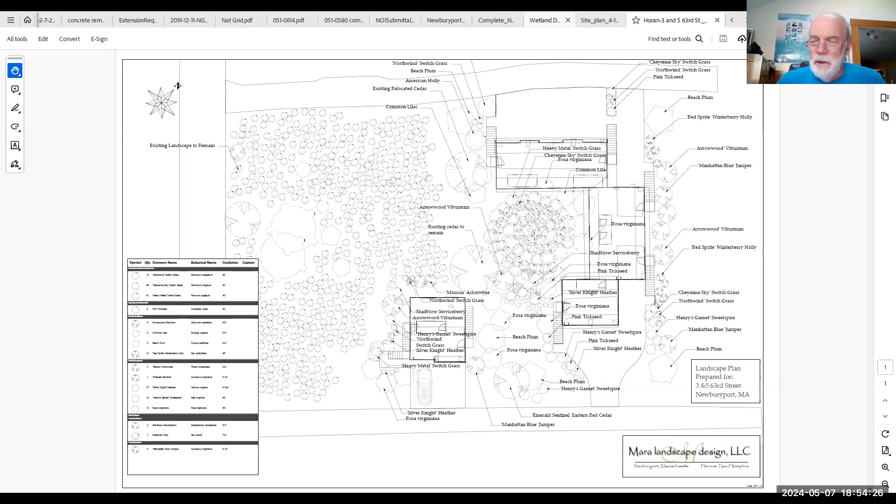Tom, have we done a certificate on the single family house right on Northern Boulevard? No, I don't believe we have. That one is no longer under the control of Chris - he sold it to a private person who built the project, and my understanding is they had the same issue with the bunnies. There's something going on right now, I think personal issues with that owner, so I'm not quite sure where they're at in following up, but they had the same thing. They put dozens and dozens of American beachgrass plants out, probably hundreds, and the bunnies just ripped them all out. So we'll need to address that at some point.

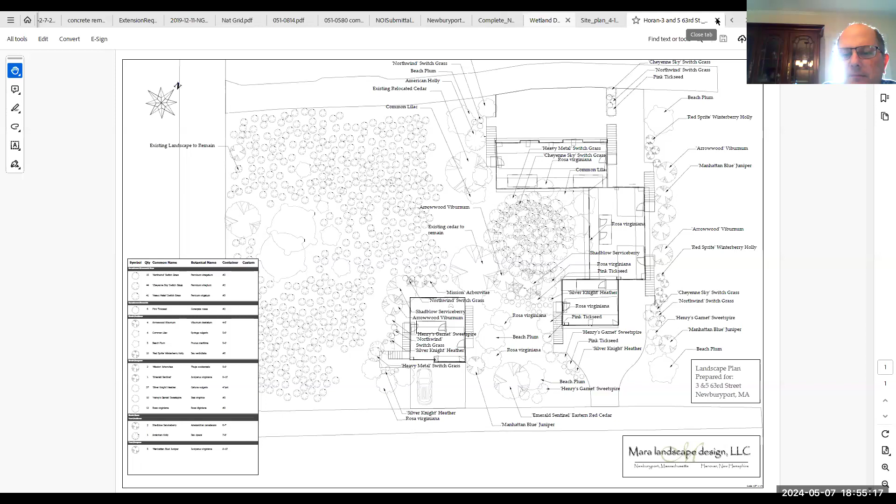Right now I'm just trying to get 3 and 5 closed. 5 looks good - I mean, sorry, 3 looks good. 3 is that single family home on 63rd.

All right, okay, that's right, set. All right, on to - thank you. Regular things.

Andrew Cole, 95 Water Street, request for extension. I switched the agenda a little bit because we had some scheduling problems. All right, never mind - Lisa Nardone, 5 Harbor Street, request for determination.

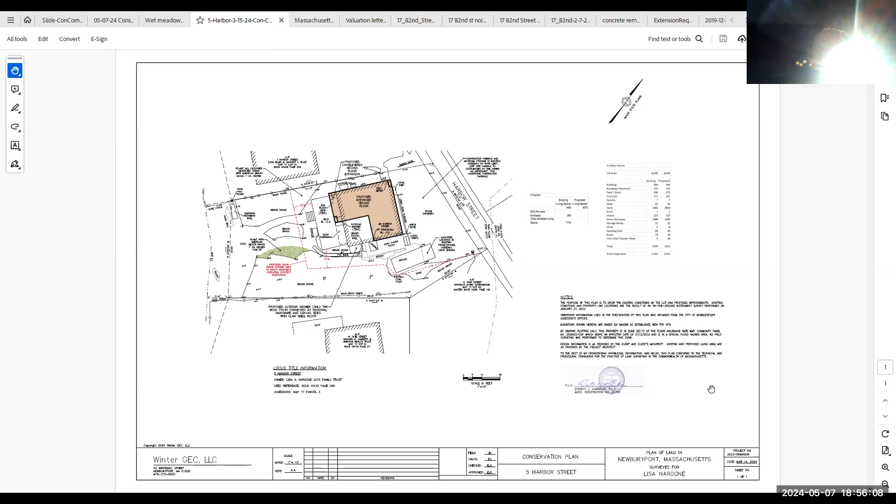Tom Hughes with Hughes Environmental Consulting. You may recall we were pretty much good with this, only we gave you a lot of information and it was too close to your meeting date for you guys to read through with regard to the 50% thing. So assuming you've all read through that, I can go back over things, but this is pretty simple, pretty much within the footprint of the building. Really the 50% rule was the big deal here.

Should I just open it up to questions at this point? This is the letter that was submitted right before the last meeting from the appraiser. Down at the bottom, he gives the summary, which shows a 27% increase in market value post-construction.

We also gave you an updated structural letter that removed elements of the project that had been taken out. And I think that was it.

So Julia, does this answer our questions? It does, because we just need to make sure that the increase in value of the structure after construction of the proposed renovations would not be more than 50%. It's at 27% - previously they just hadn't given us that comparison. They only gave us the as-is appraisal report. Now he's submitted the post-construction appraisal report and given us the summary document showing the difference in value, so this does answer it.

It's below the threshold for substantial improvement, so they can do the project without having to elevate the entire thing on pilings. Okay, so we would need a -3 for this?

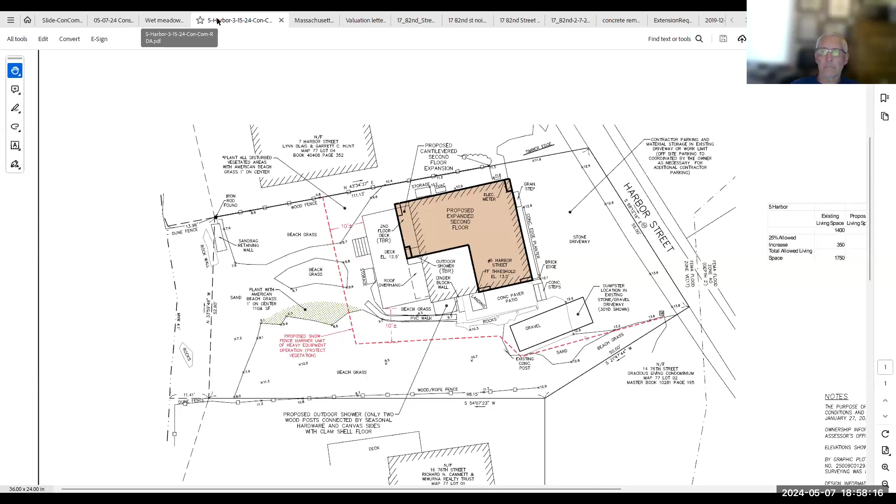Yeah. Okay, I'll make a motion to issue a -3 determination. I'll second. Roll call: Steve Moore, yes. David Vine, yes. Dan Warshaw, yes. Bill Mullen, yes. And I vote yes. All right, thank you very much - I know they're anxious to move forward.

Good evening, Tom Hughes with Hughes Environmental Consulting. You may remember this one - this is the one, Tom Lawrence. You guys had an enforcement order. We came in with an after-the-fact notice of intent.

We came up with a way to elevate the existing deck to get 2 feet clearance. You guys issued a variance on this one. We've given you an as-built that shows we met the clearances, the 2-foot clearance around the raised deck that we agreed to do.

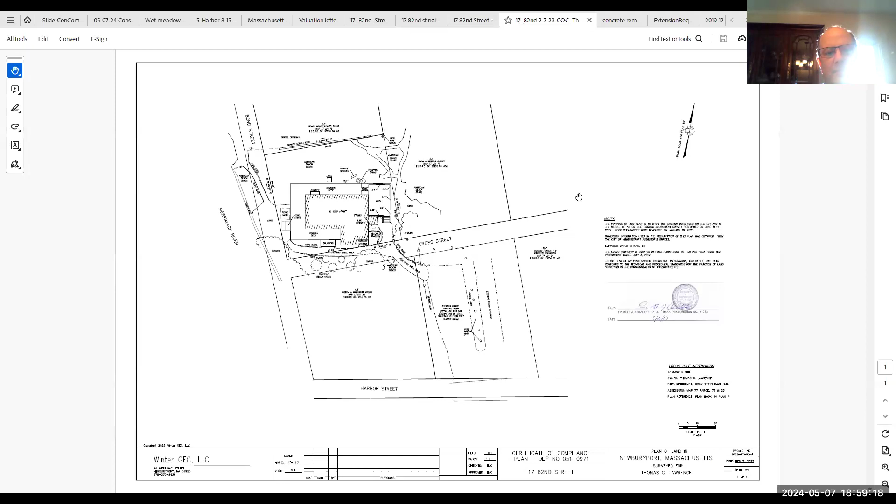Mr. Lawrence put in the plantings, put in little rope fences to try to contain the walkways, put in the crushed shell walkways, so we have defined paths and it looks really good. All this work was done last year, right before I got COVID for a month, and then it just kind of fell by the wayside to get submitted to you, as did a lot of things back then. So I'm just trying to catch up, and this is one of those things.

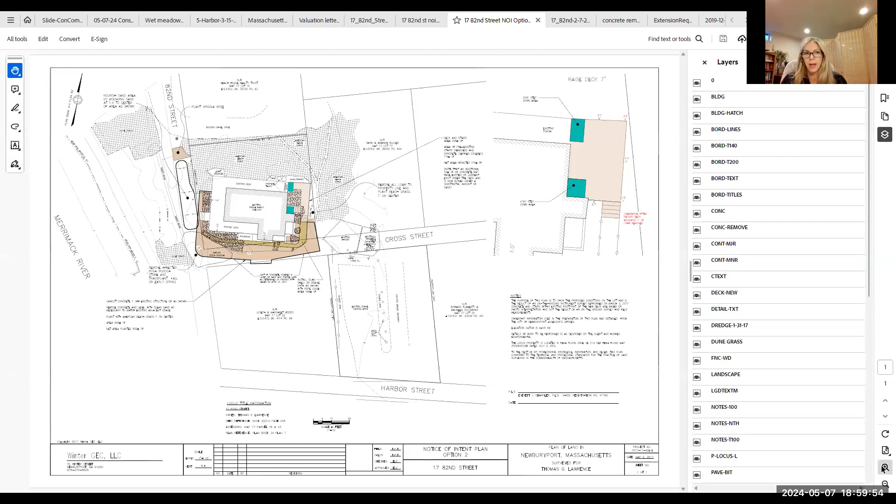For reference, this is the as-built that they submitted. This was the proposed, or the approved, plan. So you can see - is this right? Yeah, and if you - well, you just had it on a panel that had little red numbers on it next to the deck, and those were the proposed clearance areas. You all see that, or no?

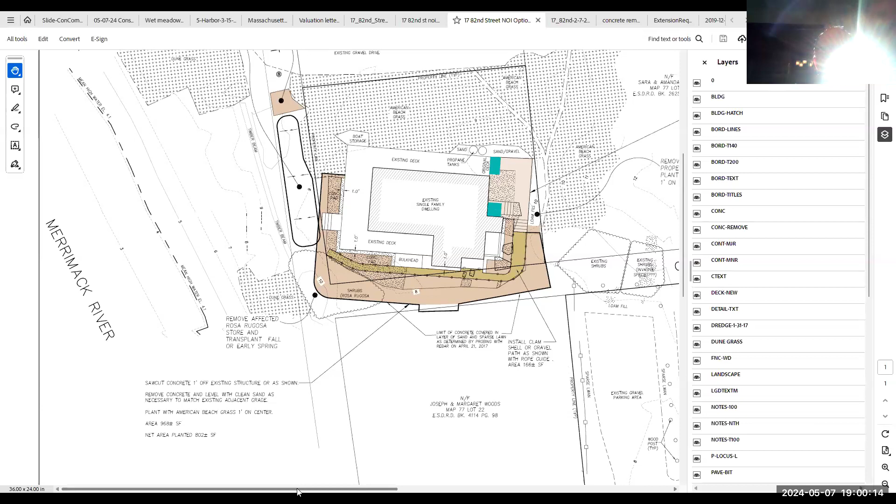Yes, if you go over to the right, you can see where we had the estimated clearance once it was all lifted up. So we pretty much got those clearances. And if you remember, there was like a berm of loam that was kind of built up around the edge of the deck as well.

So we lifted the deck. I think the deck went up about 5 inches, a half inch higher than we had estimated, and the loam went. We don't quite have the 2.9. I don't know why that didn't work out when the loam came out, but I wanted to make sure we didn't remove sand. So it may have been we hit sand before we thought we would.

But we've got over 2 feet clear, which was really the main commitment we made. We have 2.4 where I thought we would have less at the other end. If you take a look at the first, at the top you got 2.4, 2.3, then 2.1, 2.2, and 2.05. So we made it around the whole thing with over 2.

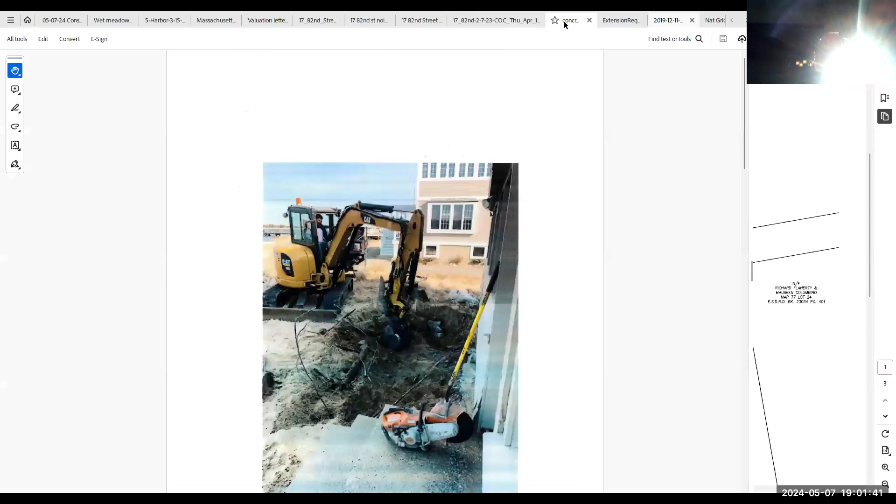Earlier on, right after the work was done, part of the mitigation that was agreed upon was to remove a lot of the concrete that was around the site, and restore it with beach grade sand. So they did submit, during and after construction, these photographs of the removal of the concrete area. So you can see them doing that. It's really right on the beach. So that was just sort of evidence at the time.

But Tom, we do need site photos now, associated with the certificate. I uploaded them into the system.

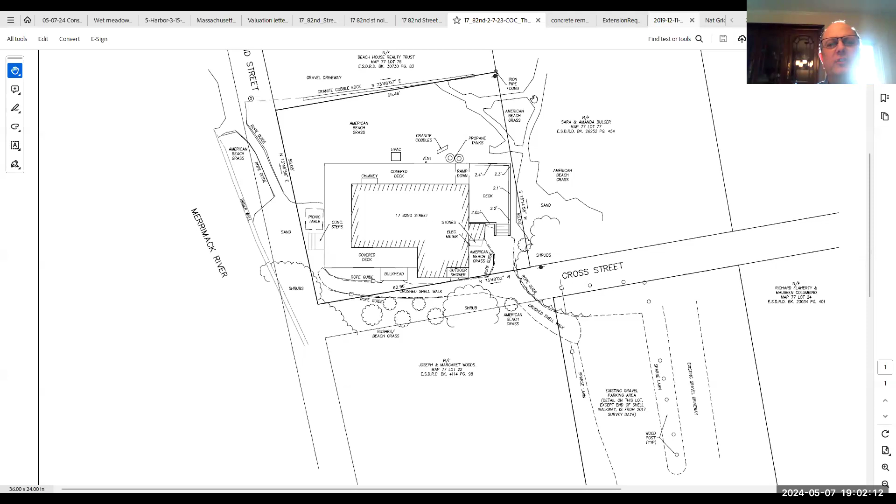This whole site photo sheet. If you want, I can share them. You have them uploaded right now? Yeah, could you just, so then we can take care of it right now? Let me just find them. Hold on a second. Oh, I'm looking at your thing. Hold on a second. I'll need you to stop sharing. Let me just get them open. Okay.

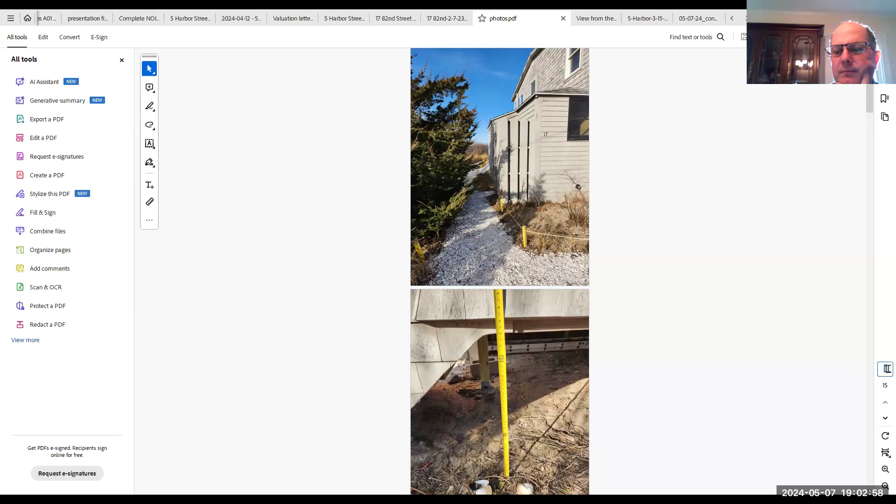Yeah, these are uploaded into the OpenGov system. So if you can see, here's, you know, the rope things, these are all planted. You've got the clearance.

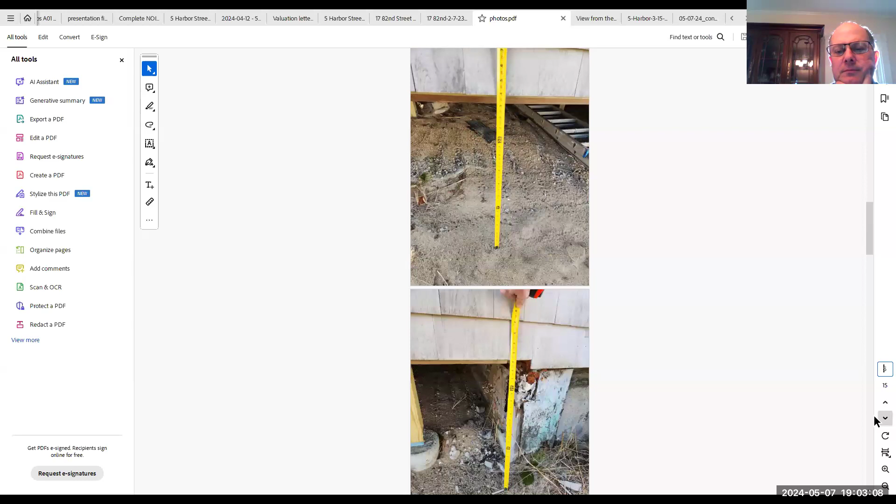And you can see right here where this doesn't line up anymore because it was all lifted up. And this one is a little earlier than the rest. All of these were taken around the time the survey was done. I just have this because I was out there when they were planting the plugs of American beach grass. So I just thought it was good to show you that didn't just come in on its own. It was actually put there.

So I gave you a whole bunch of photos of the site, and that's all uploaded into the system. And Tom no longer owns it. It's owned by Paul Don, as I said.

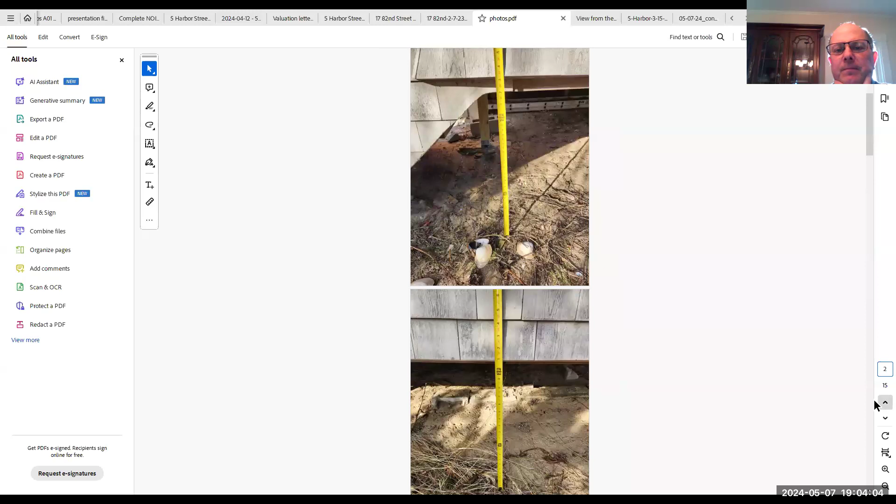So Tom, where are the pictures that were concrete and aren't anymore? Julia showed you those pictures. This whole area was all the big concrete apron that came off, and some of it went under the sand. This whole foundation had like a 5 or 6 foot concrete apron that went around the whole thing. And so that was part of the mitigation and justification for the variance, the fact that removal of that much concrete from the dune system more than offset the impact from the deck.

And there were some other considerations in terms of planting, and I believe there was an escrow that was paid into the city that the city can use for Mobi-Mats or whatever. We were going to do some nourishment on the beach, but there was complications because the beach is shared ownership, and you may remember that Mr. Lawrence and the neighbor weren't always seeing eye to eye on things. So I think in the end, the escrow money was just paid.

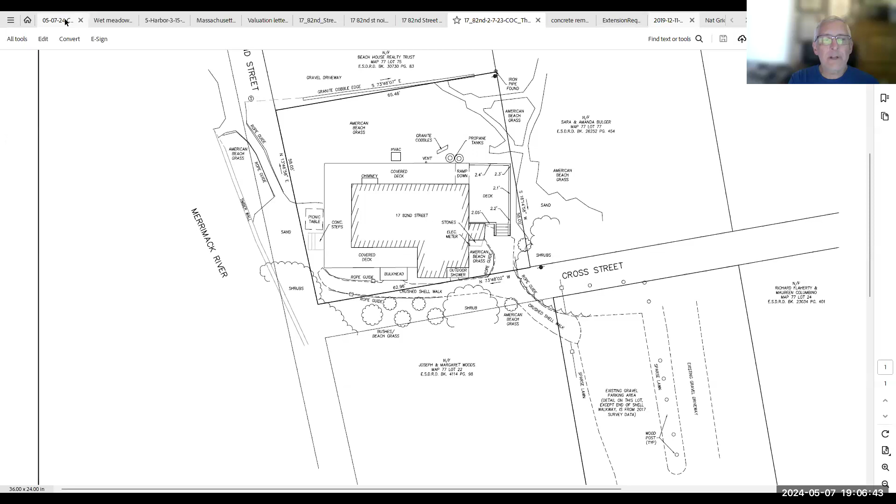All right, next item is Andrew Cole, 95 Water Street, request for extension.

Julia, your sound is off. Sorry, Andrew, I'm gonna promote you to a panelist if you haven't already been moved over, and I thought I saw Teresa on here as well. Yeah, I'll just. Teresa Portante.

Hi, Julia, can you hear me? Yes, Andrew, sorry, I wasn't familiar with this format. I kept ending and rejoining, I didn't know what to do there. Sorry about that. No, all good.

I think the only other person for us would be Gary McAllister with GZA. Let me see if I can find Gary McAllister. Here he is. Hopefully that will work. Should be able to move over momentarily. Here we go. All right, so here's your extension request.

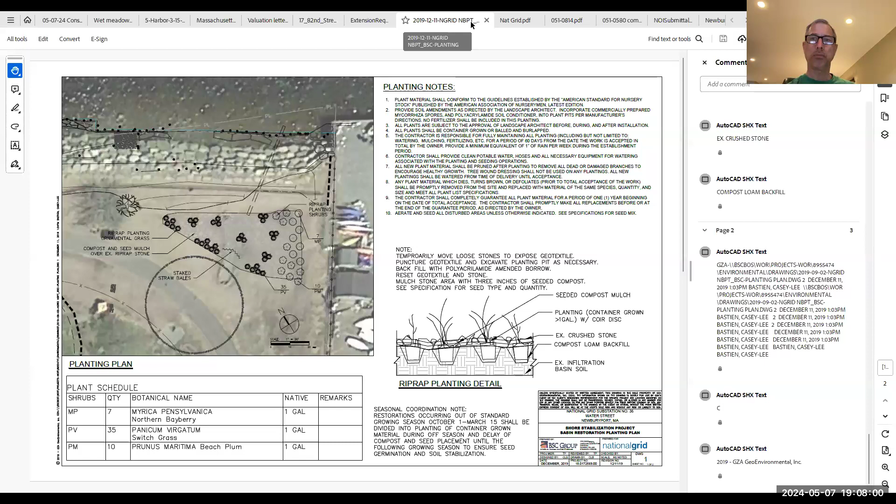I also have the old plan that was approved for this area that we've been discussing so much over the past few years. So maybe we could start with the update on the revised plans, and then we can do the extension.

Okay, I'll kick it off, and Teresa and Gary can add in some details. We had met with Mr. Vine and Mr. Moore on the site in the January timeframe, if I'm not mistaken. We reviewed the area because we were having unsuccessful revegetation, looking at the area and the fact that we had water pooling with the high tide. We discussed in the field the application of soil, sloping it back to the outlet pipe, and the installation of a duckbill valve to reduce flow in and allow water to escape.

The general idea was reseeding. That plan is reflected in the markup that was sent over a few weeks back. Do you have that open by chance? That's what I still don't have. All I got from you was that we're going to do the duckbill valve and we're going to loam and seed — I didn't get an actual plan.

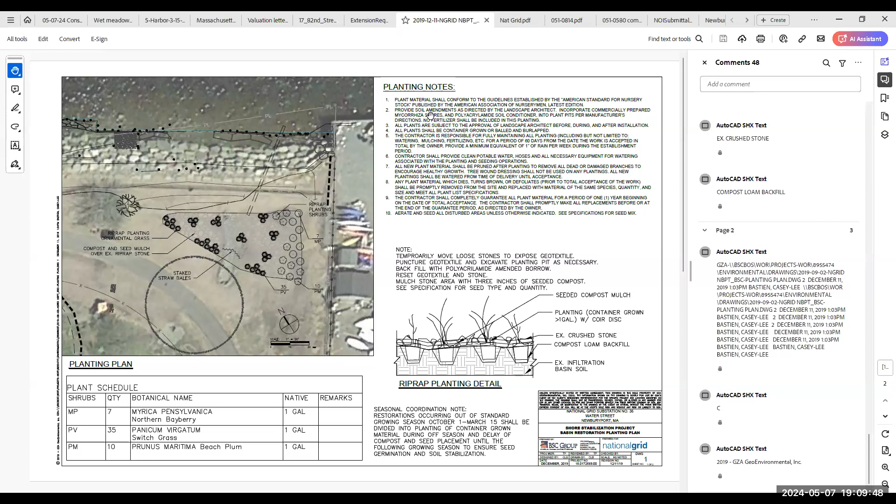I'll submit it directly after this. I can attempt to share the screen — I apologize if I had thought it was attached and sent. It could be that I somehow missed it. Let me see, I'm just unfamiliar with Zoom as much as I am with Teams, so let me try to share screen. There it is. Andrew, I'm happy to share if you can't get it. Yeah, if you have it up and you're more savvy with Zoom, go ahead — I'm just clicking around. Want me to stop sharing so you can share? Yes, please, thank you.

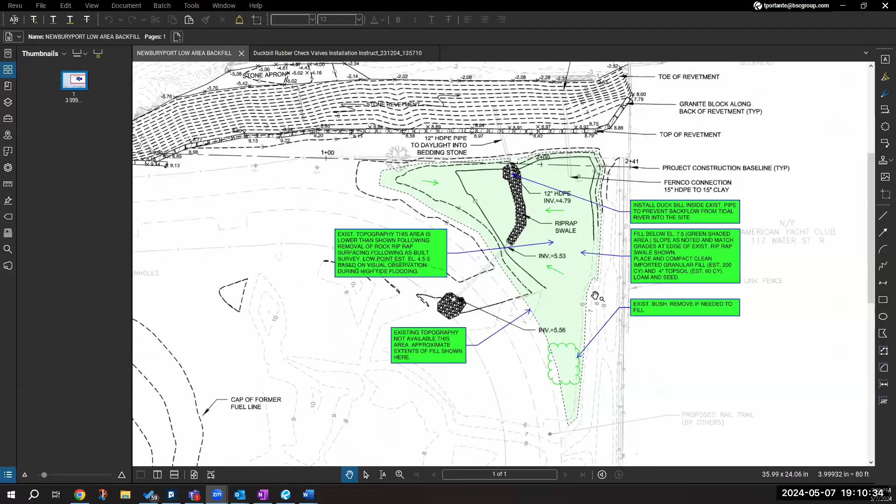There we go, thank you, Teresa. This is the plan marked up with the discussion we had with Mr. Moore and Mr. Vine, and Gary was there as well, so he can speak to some of this too. If we zoom in a touch — there we go. You see the green arrows reflecting the added soil sloped towards the pipe that heads out through the seawall, and the duckbill valve installed in the inlet of that pipe. We would reseed the area, and the idea is that during high tide events, as water comes in, it will be able to leave with the sloping, heading toward an exit, with the duckbill valve reducing flow in a slow-flow kind of concept.

We were intending to reseed utilizing the original seeding plan that was in the set provided originally, consistent with some of the native species. That's what we were going to reseed with, but more of the herbaceous seed type — we weren't going to be doing the larger shrubs. So that's the concept of the repair, the additional measures to try to address this area and the commission's concern about the water flowing in and it not being vegetated.

Gary, I don't know if there's more to comment on with the markup here, thoughts and general consensus from what we talked about with Mr. Moore and Mr. Vine in the field. Yeah, when we were out on the site, I think everyone was in pretty much agreement that a combination of filling the area up and putting in the backflow preventer would be sufficient to allow this area to vegetate and also improve the aesthetic quality of the walkway.

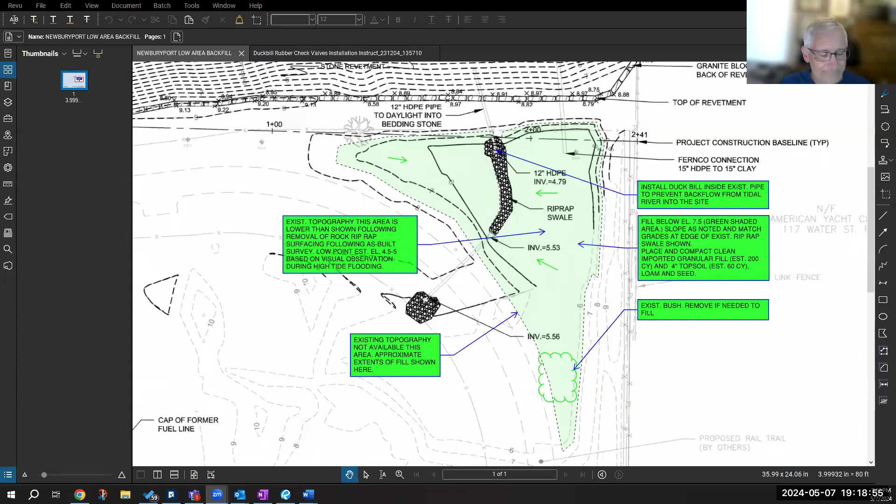Okay, I get that. I guess what I was attempting is maybe towards the top end of this low point area, if we slope it to the pipe out, but at the cedar itself, try to bench it down a little bit, really getting the contractor's opinion if it's feasible to retain. Yeah, I'm fine with that. I want it to live too, but if it's not gonna, then it's not gonna.

I guess the only other thing would be if you do have to remove it, we would like another tree planted. Obviously nowhere near that size, but something to replace it, within this swale area, or whatever area near there that's viable. Yeah, I guess I'm able to commit to this particular area. This is sort of our sticking point to close this out.

This cedar, truthfully, it survived the inundation of salt water here, right? So I kind of feel as though it's a tree that can be retained. It's just a matter of, to Gary's point, if they're adding soils and if it's directly in the way of where they need to address the contour. So my first attempt is going to be talking with the contractor - can we retain it, is it still manageable to slope and get this water to leave. And if it is a cut and remove, a planting in this area would be manageable, but species and size are to be determined.

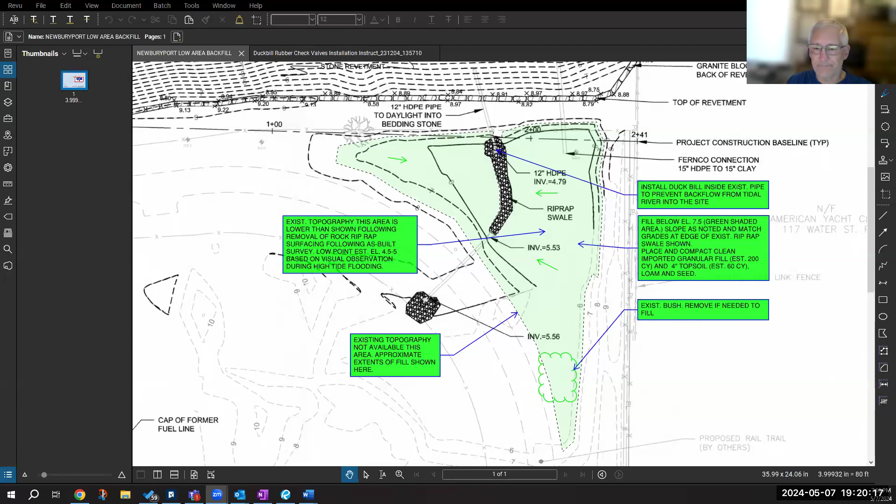Okay, good with me, if anybody else, but... Yeah, when you get to that point, if you could let us know. And given that the cedar has survived and is one of the very few things that has survived in these conditions, maybe it makes sense to plant another cedar in its place.

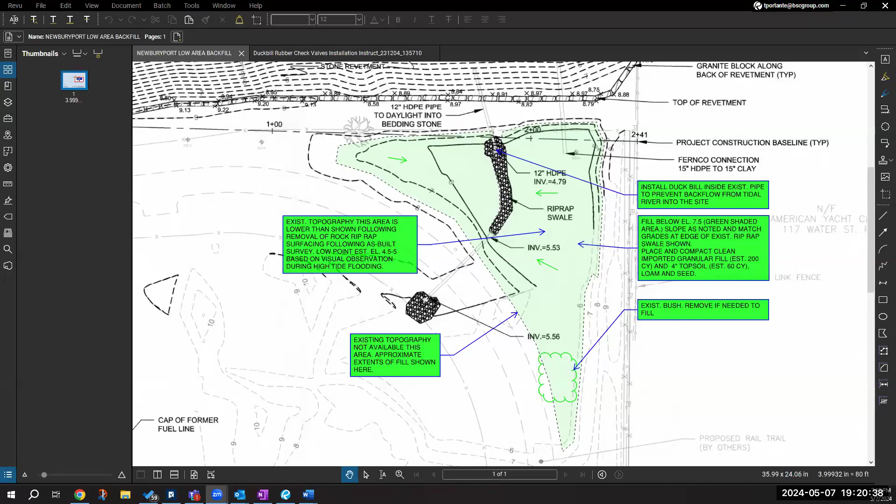Yeah, I'm perfectly fine doing an in-kind cedar-for-cedar concept. It's just a matter of the contractor sourcing it and being able to get it on site and excavating with equipment there. I guess my only fear is just the size of the cedar and equipment it would need - double mobilization kind of concept is all.

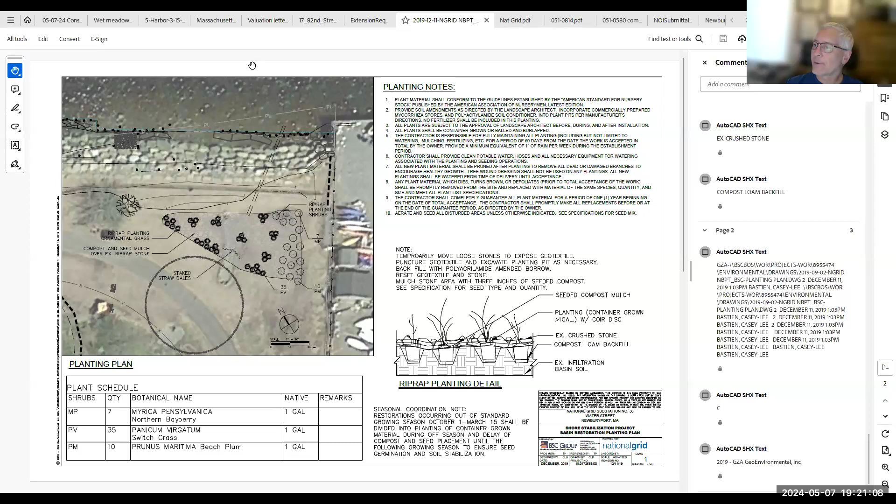All right, do we have anything else? Anybody want to make a motion to continue or extend the order conditions? Yeah, I'll make that motion. For a year - one year, yeah. Okay, second? Yep. Okay, all right.

Roll call: Steve Moore, yes. David Vine, yes. Dan Warshall, yes. Bill Mullen, yes. And I vote yes.

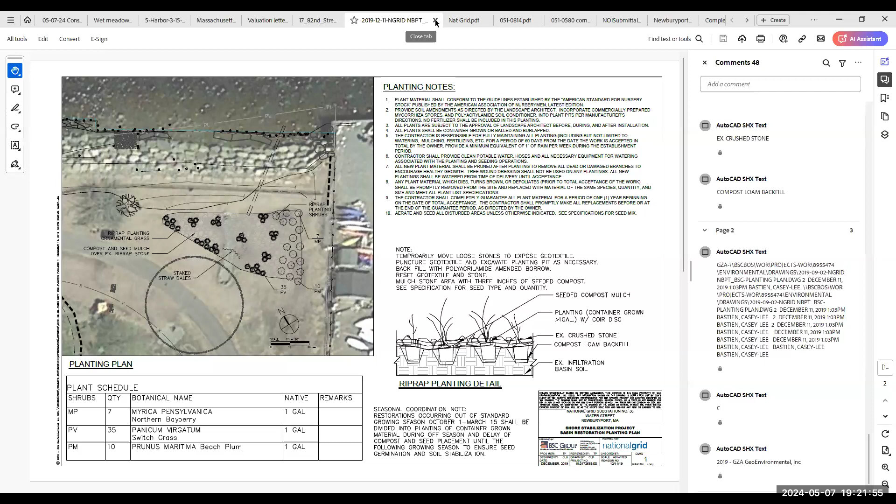All right, thank you, appreciate your time. Work is anticipated to start this week - just as an FYI, Julia, we had commented on that and discussed, so that's still the plan. Okay, great, thank you for letting me know. All right, have a good evening. Thank you. Very good, good night, thank you everyone.

Oops, oh, what did I just do? Hold on a second. Those are the minutes - where are we right now, Julie? Oh wait, um, so now we are moving on to 2955 5th Street. Okay, somehow or other I just lost all my documents that I had stacked up here, so you're gonna have to hold on for one sec.

Let me just pull up the 2955 5th Street. Oh, here we go, all right, I got it back. So, sorry about that - 2955 5th Street.

Can you all see my screen with photograph 1, photograph 2? No, no, okay, sorry. All right, can you see that now? Yes, yes. Okay, so now we have two orders of conditions that need certificates of compliance for 2955 5th Street, and they're both relatively old - one's 2002, one's 2008. The representatives, I believe, are here, so I'm going to move them over to speak to this tonight.

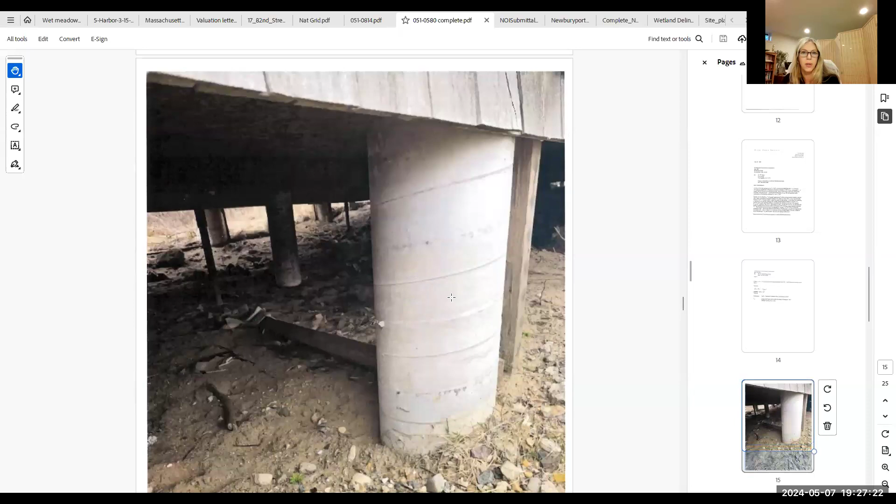And then these are the photos. They put in concrete sonotubes, which back in 2002 apparently was okay. These are actually photos of the completed project now, but you can see the sonotubes that were originally put in and how the house was elevated back in 2002. So that's the 2002 order of conditions, which in my judgment was done according to the approved plans.

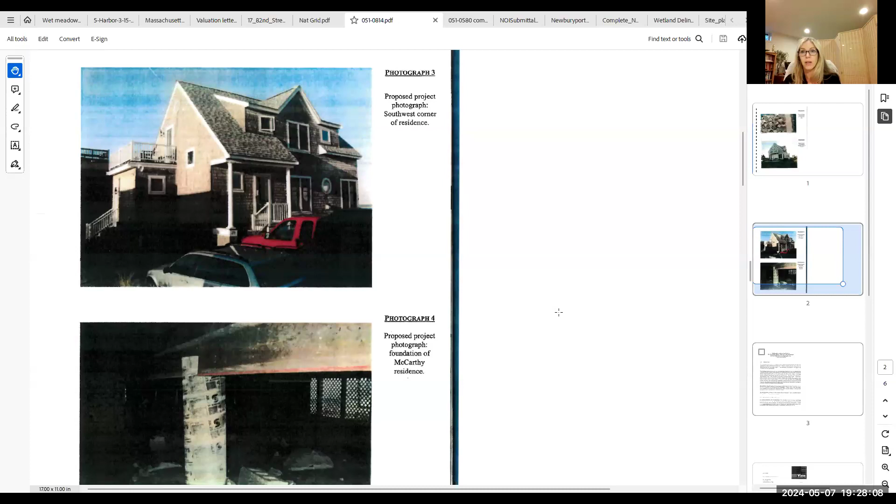Then we move on to the 2008 order of conditions, during which, because of all the erosion happening out there, it was looking a little scary in this particular area. They wanted to make sure the structure was really structurally sound and that those pilings were extra strong. So they hired Vine and Associates to supplement and, as Dave would put it, put belts and suspenders on the existing structure. That's what this one is.

They said their building foundation consists of 7 to 12 inch sonotubes that do not provide an adequate bearing to the 2-story building. So the scope of work was to stabilize the foundation by expanding the sonotubes by means of placement of helical piles attached to the side of each sonotube, 12 inches in diameter. They did that in 2008, and in 2009 David Vine of Vine Associates wrote this letter reviewing the completed work, confirming it was done according to the approved plans.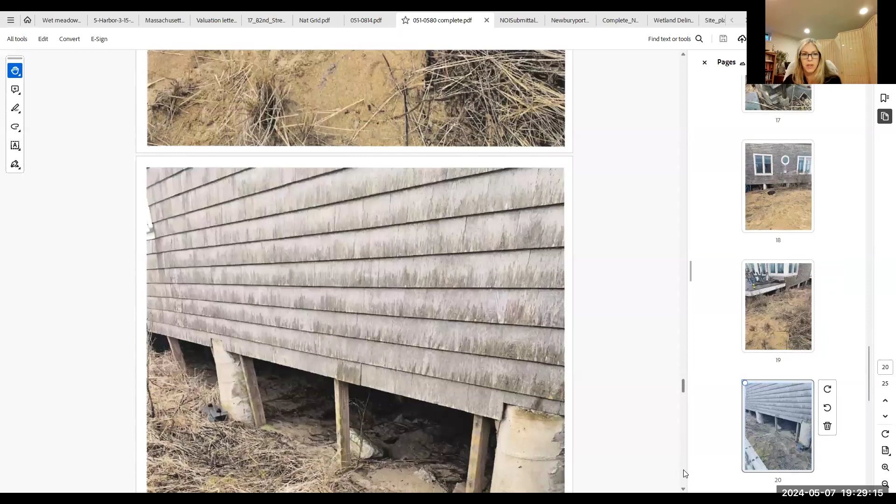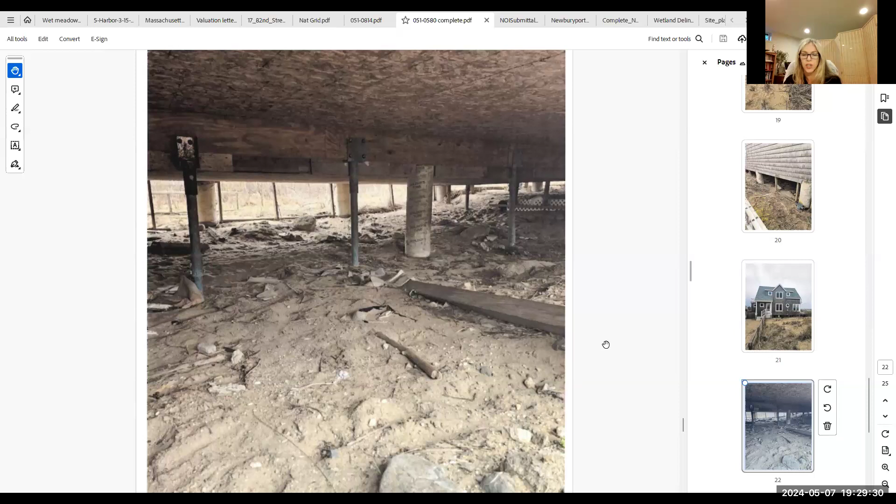So we have that confirmation, and in addition to that letter from 2009, we can see today's photographs, taken by the applicant and their representatives. You can see the helical piles supporting the existing sonotubes, and there are pictures underneath as well, so you can see that was done - it's incredibly stable, and the foundation is solid and not going anywhere. In addition, they don't have an erosion problem anymore, so things are in good shape.

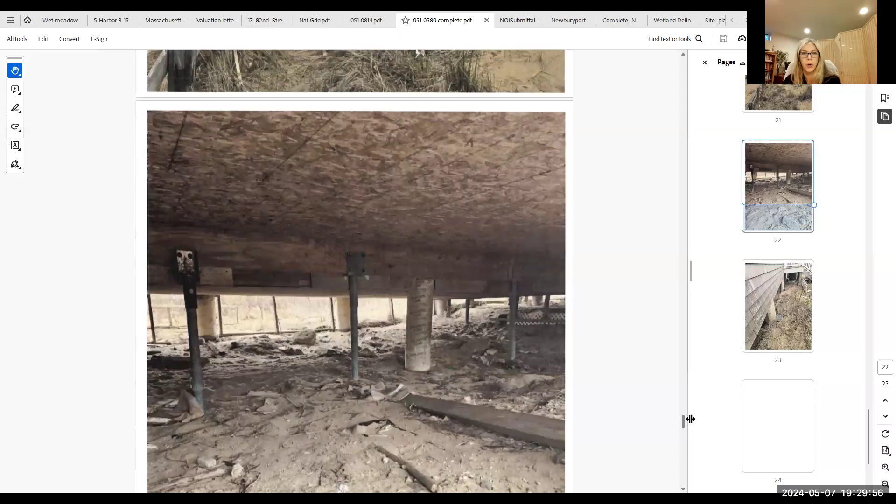One of the special conditions with that order of conditions in 2008 was also to remove the lattice that was surrounding parts of the foundation. You can see all that lattice has also been removed - there's no more lattice surrounding the foundation. It's completely open underneath. So it took a little digging, but...

Starting from not much of any information on this. Right, Vita did some amazing detective work. Thank you, David, Julia. You were so much help, both of you. Thank you so much. And we got it sort of figured out. So that's it.

The sonotubes were put in 2002, and the piles were installed in 2008. The piles were designed for something like 15 to 18 feet of erosion, so they were substantially put in.

Do they screw into the ground, or are they driven in? They had to get a certain amount of embedment, and then they were proof tested in the field. So do they screw into the ground? Yeah, that's it.

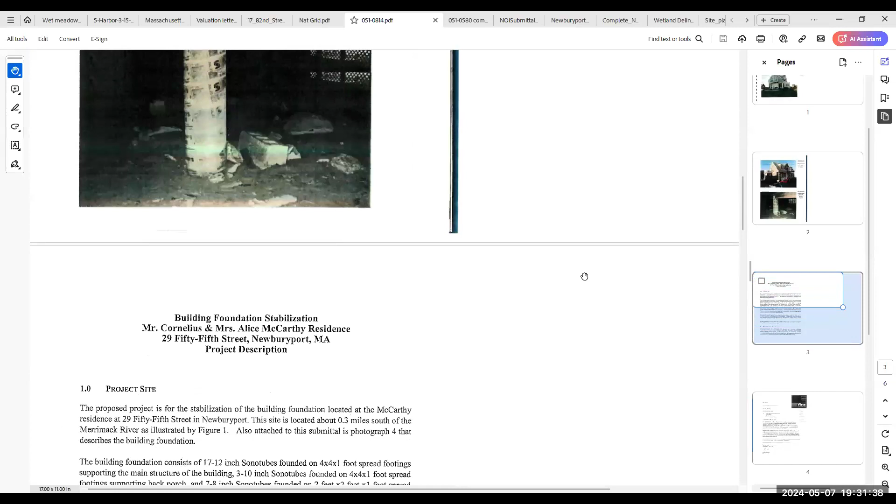Okay, we have anything else? No, okay. So...

Let's work on the first one, 0580. Can I get a motion regarding the order or certificate of compliance with that?

I'll make a motion to issue the certificate of compliance for this one. Second. Okay, roll call: Steve Moore, yes. David Vine, yes. Dan Warshall, yes. Bill Mullen, yes. And I vote yes.

And on the second one, 0814, can I get a motion on that one? I'll make the motion for 0814. Second. Roll call: Steve Moore, yes. Dan Warshall, yes. Bill Mullen, yes. And I vote yes.

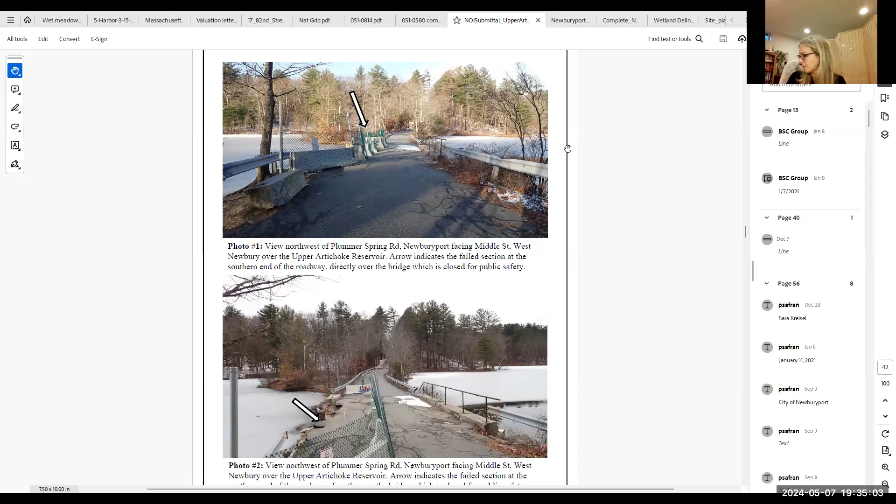They want an extension because what happened was they set up all the erosion controls to start work and did some initial tree removal along this side of the road, then they bumped into municipal funding issues. I don't know why they began the work without having those funding issues taken care of, but regardless, they put it on pause and it's been on the back burner ever since. So they would like a 3-year extension, and I have the letter from them.

This is the letter. It basically says project activities began early 2023 with removal of the hazardous trees - there were some trees falling down, so they took those down. The project could not be completed under the original OOC due to initial funding constraints. They anticipate putting the project out to bid this summer for 2025 construction, and nothing has changed in the scope of work or the project plans. So they really just want an extension to get this started in 2025.

So Julia, is there a big hue and cry to get this thing done, or is it okay to just leave it the way it is and have it be a park? Everybody seems to enjoy it the way it is - I know that's always been your position, Steve, on this one. It's been closed for 6, 7, 8 years, and people are used to it. To be honest, I just don't know much about why it was paused and what the level of priority it is for people or for the administration.

But I do know that it was a priority. It is a broken bridge. It is a main travel route for a lot of people between Newburyport and West Newbury. Not everybody, but certainly for a lot of people in those neighborhoods. And so it's always been on the agenda to get it done. And that's why they moved forward with permitting.

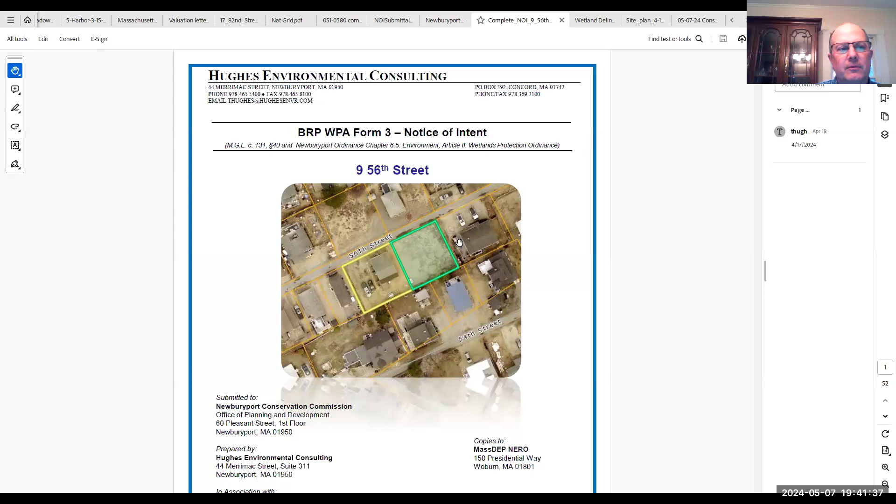So the project is a tear down, rebuild, put up on piles. Julia, if you just want to go through a couple slides here. Keep going past all my narrative. I'm sorry, I didn't have time to throw together a presentation file. That's all right, I got it. I'm just trying to see if I can make this a little easier and scroll down.

I miss the old version of Adobe. Oh my gosh, it's insane just how much more complicated this is. All right, I'm on my way.

All right, so here's the locus map. So the project's located on Plum Island, a barrier beach, coastal dune within land subject to coastal storm flowage. Maybe go to the next one.

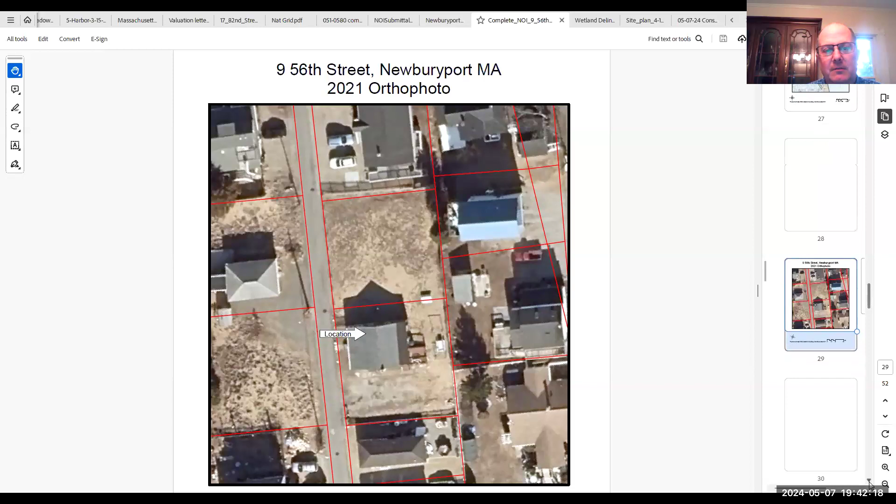So we're located kind of where the VE and AO come together, right in that area.

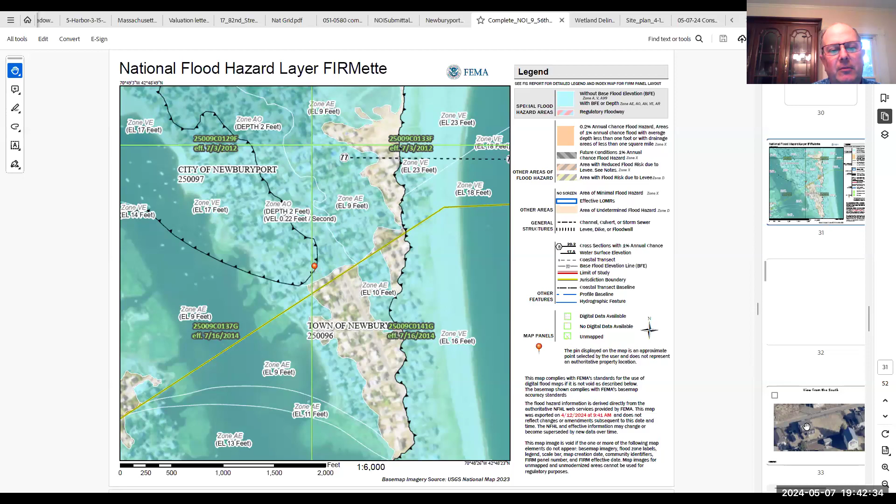So this isn't one of those sites where we need every square foot of vegetation to make the project work, so I'm not really worried about it. I just want to make sure we get it accurate on the plan set and then make the project fit. So if we can go...

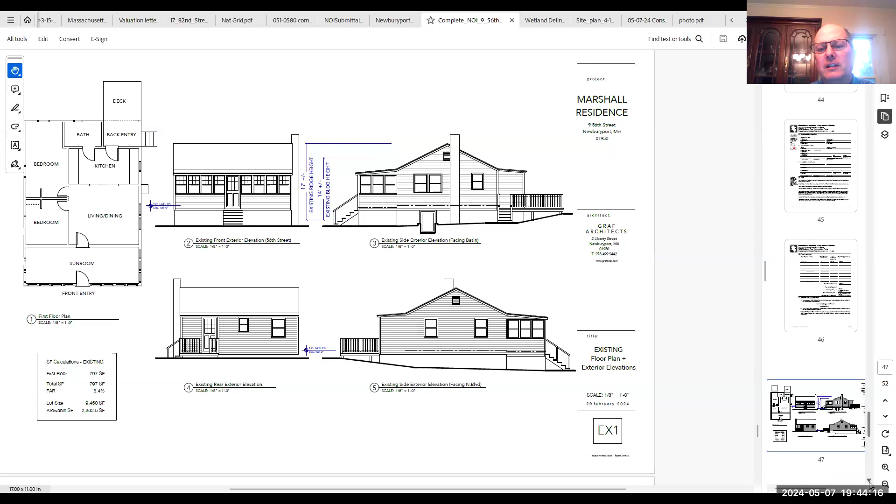Okay, so this is the existing condition profile view. If we can go to the next sheet. Okay, this is the plan view from the architect. Next sheet. Okay, so here's the profile view. It's Eileen Graf's design.

These probably start to look familiar to you guys, but it's elevated up on piles. It does not exceed 20% of an increase in structure size, so it fits the redevelopment standard, and it's elevated significantly above the floodplain. We can go to the next.

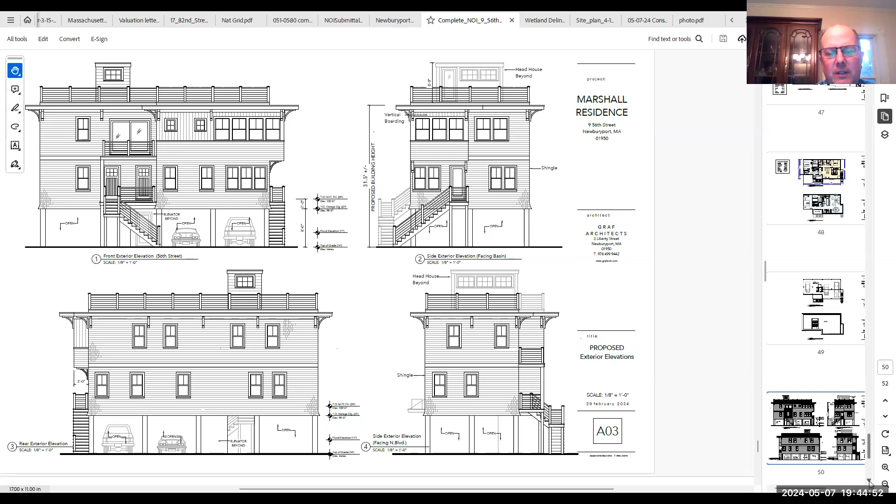For point of reference, the picnic table in the back is a good way to see how our vegetation line lines up with everything when we're out there. There's a couple other features like that concrete area. And then, Julia, I don't know how it looked behind the driveway, but that area was pretty barren as well.

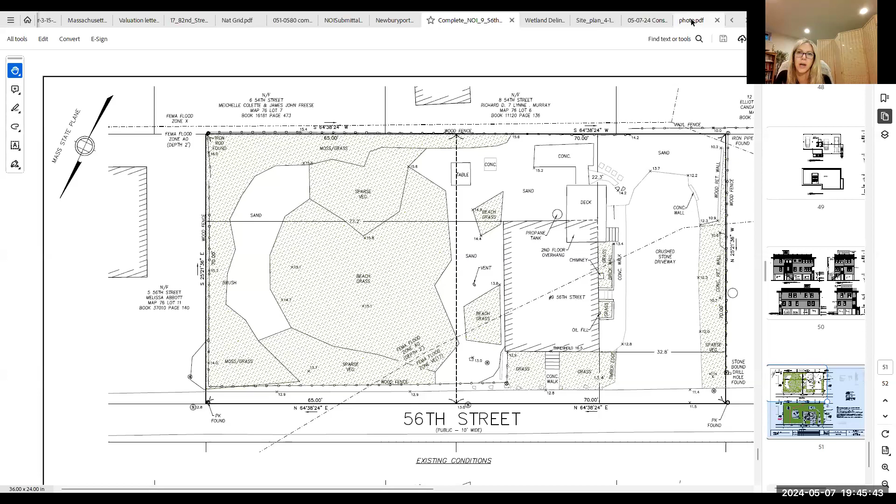Yeah, looking at that area that we called sand off to the left, it doesn't appear to exist anymore, so there must have just been dormant root underneath that's come up. So we'll do the site visit if the commission would like, and then we'll update that.

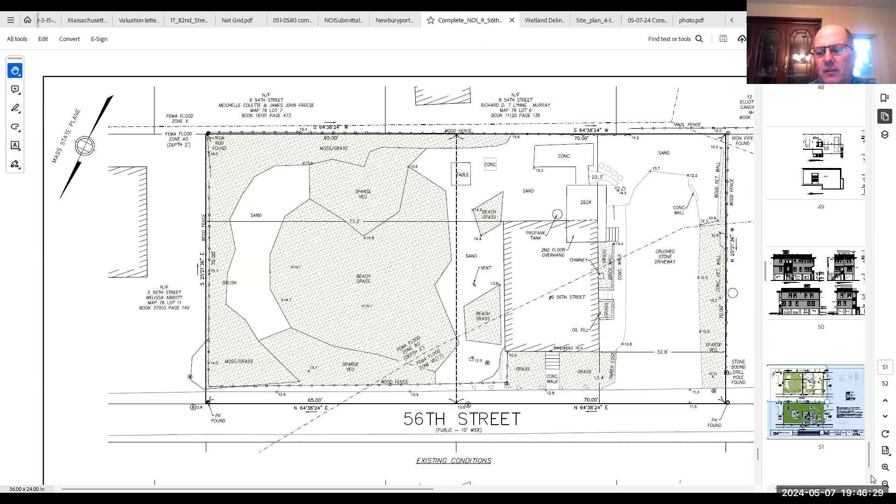We can go to the proposed panel, which I think is the next sheet. So what we did is we tried to consolidate things and give defined recreation areas. It's a big lot, so we figured we would have the two clamshell patio areas. If we don't have enough vegetation for those, we can look at the vegetation table.

As currently counted, we're creating a significant amount of vegetation surplus, even with this plan. So if we end up short on the vegetation number, we can always pare down the clamshell patio on the left. Even the one on the back, if we needed to, could be pared down. We do want to provide some outdoor recreation space, but it's just a matter of making sure the math works.

So, Tom, there seems to me to be an excessive amount of parking here. So parking, this is a single family, it's going to have an in-law. Well, there's parking for 3 cars underneath the house, and then it looks like there's parking for 3 cars outside of the house, and then there's another parking lot beside the house. Yeah.

I mean, their assumption is basically that they're going to be tight on parking with family and people coming to visit. And we have the vegetation numbers to make this work, or at least I believe we do, even with that change.

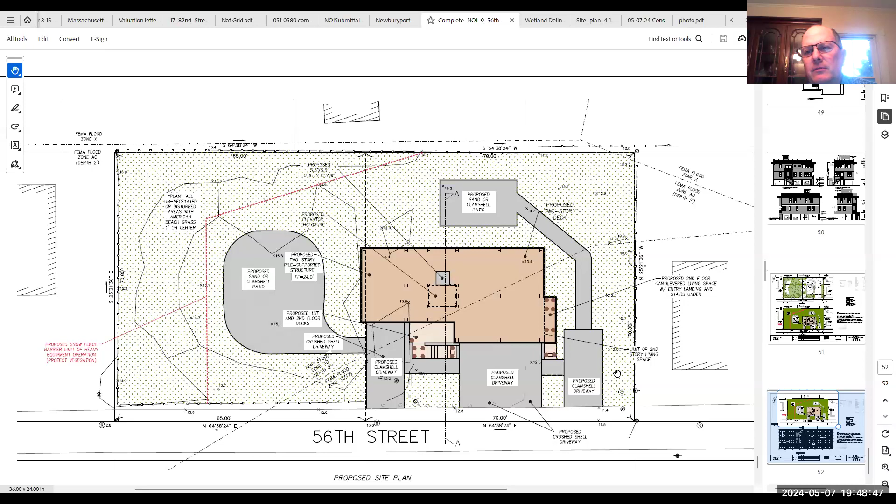If we can look at the table, if you can pan around on the plan, maybe on the other sheet, there's a vegetation impact right here. So you can see, again, I want to disclaim this based on our current sand count, this is a 1,000 square foot surplus of vegetation.

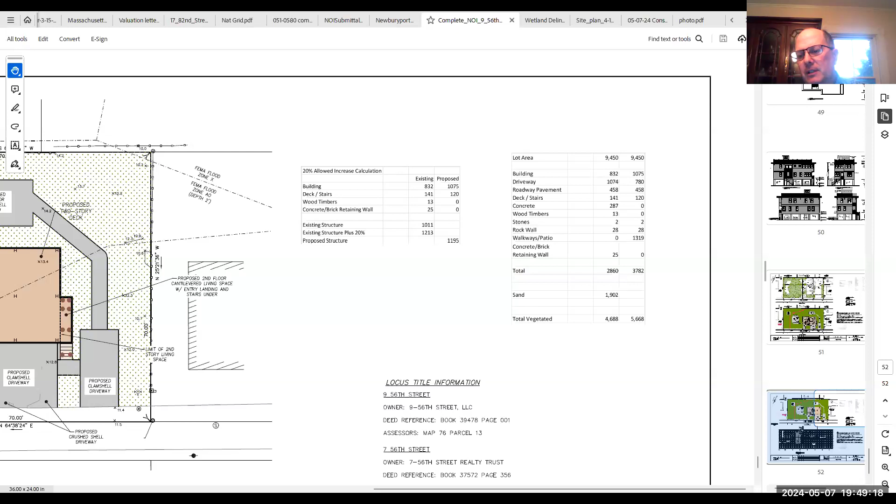How did you count? I guess that's the question as well. So if you go back and look at the existing conditions panel, we showed you what we counted and didn't count. Our footprint of our building is essentially right on top of the old building, so all of the new stuff is the clamshell driveways.

And a walk to get out to the back, and the one off to the left. Keep in mind, right now they park on that right-hand side all the way back almost to the property line, so they have a lot of parking on site now. And the one other thing that I've seen on Plum Island is when you don't give people enough parking, they tend to create it over time. So I'd rather, if we can afford it with the vegetation count, show enough parking rather than have it be something that creeps over time.

But regardless, we can make whatever adjustments. This structure does also have an elevator proposed that is compliant with the FEMA technical bulletin standards, pile supported, consistent with others that you guys have approved.

So with that, I think what makes sense is for me to answer any questions you guys have, see if there are any abutters here, and set up the site visit. We can adjust our vegetation numbers to reflect what's actually happening on the ground now, and then adjust our plan accordingly. If it means paring down one of the parking areas or significantly cutting down one of the patio areas, we can do that.

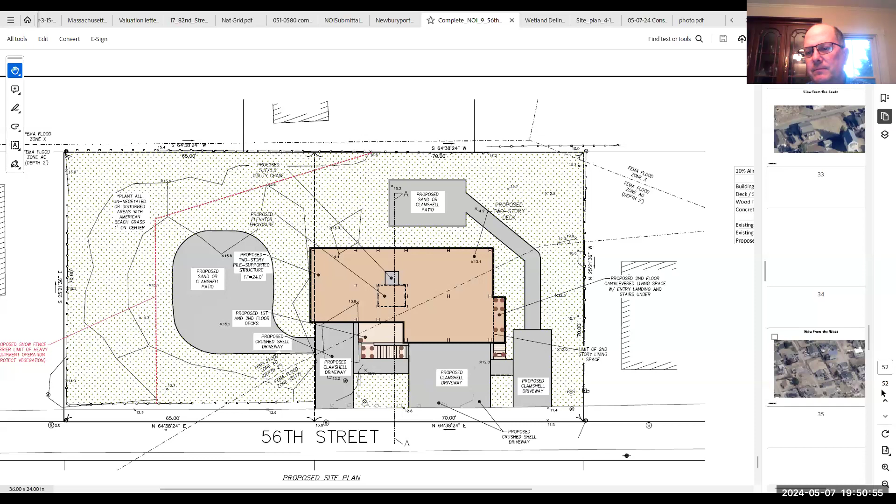So is there a fence along 56th Street there? Yeah, there's a fence. You saw it in Julia's photos, like a sort of old picket fence. Okay, so that would prevent parking creep in that direction.

Right. And I guess if we keep the parking as proposed, I'd like to see something that prevents parking creep in the other areas.

Yeah, we can look at it, I'll talk to the clients about it. We can talk about cobble edging, or we could maybe even put in cedar posts or something. I want to think about snow removal and whether something like that would get damaged, but we'll try to come up with something.

Okay, and for all the vegetation, it's all beach grass. Are there any shrubs planned for a little variety? So I believe in the narrative, I usually put that for the purpose of the application, everything on site right now is pretty much American beach grass.

That's all we were planning, but I usually put my list of native shrubs because what happens inevitably is these people spend an awful lot of time with Eileen. They work on floor plans, they work on the house, and they can't think about the outdoors. Then they start building and realize they want some more plants. If you would like, we can look to try to get some cedars in there, some bayberry, maybe some beach plum, and I can talk to them about that if that's something you'd like to see.

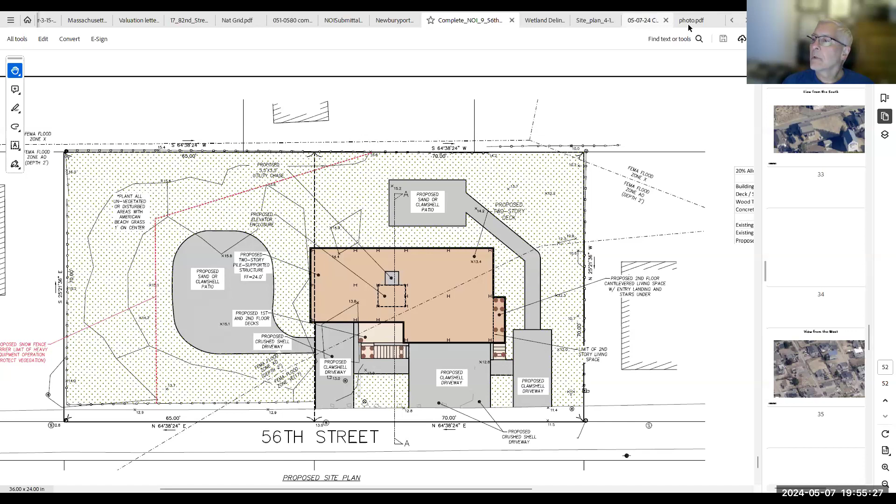Where are we now, Julie? We've got... can you see the agenda? So we should be on Dexter. That's right, we continued the other one, I forgot about that. So the next item is Adam True Home Designs, 14 Dexter Lane, notice of intent.

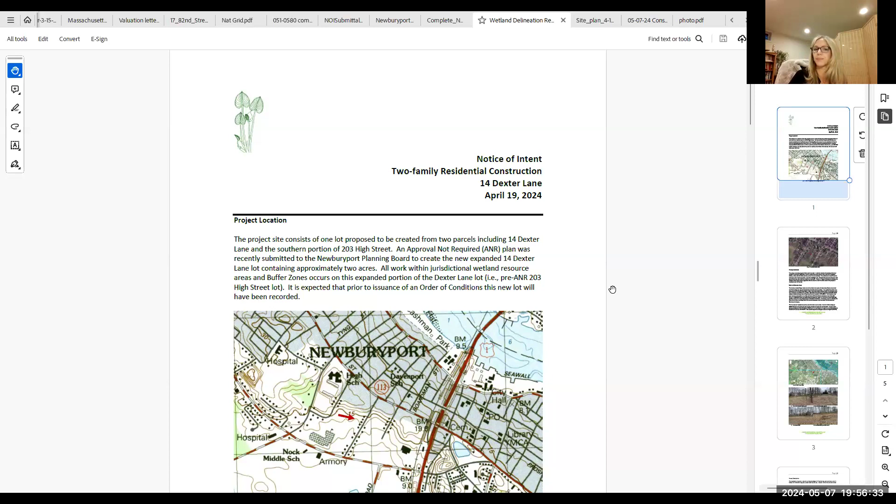I believe Mary Rimmer is here, so I just promoted her to panelist. Hopefully that works. And if there's anyone else here to represent the project, I see Adam as a guest — I'm wondering if that's Adam True. Is that Adam True? I believe so, yes. Okay, I'll promote him to panelist as well. Thanks, Mary. Here's the notice of intent, and I have your site plan as well. Feel free to walk me through it, or share your screen, either way.

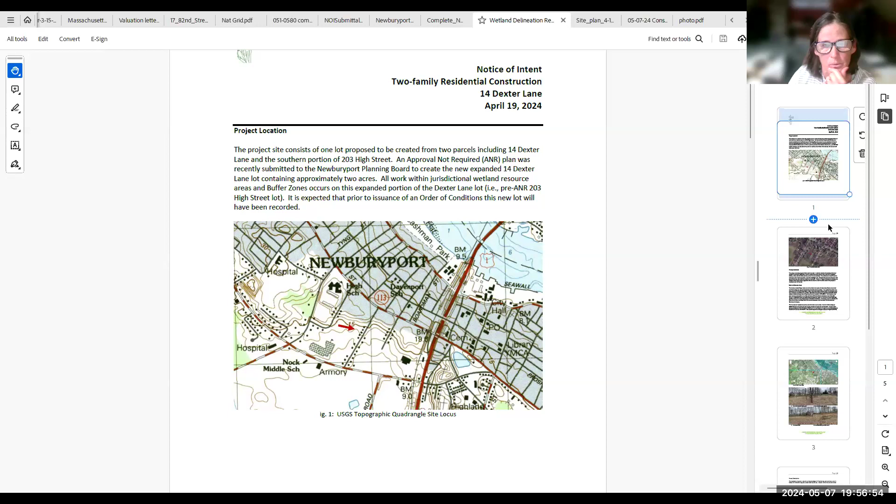For the record, it's Mary Rimmer of Rimmer Environmental Consulting, and Adam True, the applicant from True Homes Design. This project is a combined lot of 14 Dexter Lane and 203 High Street. An ANR has been submitted to the planning board for approval. Essentially, that's 203 High Street, and that's 14 Dexter. The idea is to take the southern portion of the 203 High Street lot and combine it with the 14 Dexter Lane lot. We expect that to be approved at the next planning board meeting. It's been filed as 14 Dexter Lane for consistency, since that's how the order will be issued. The new lot will be about 2 acres in size.

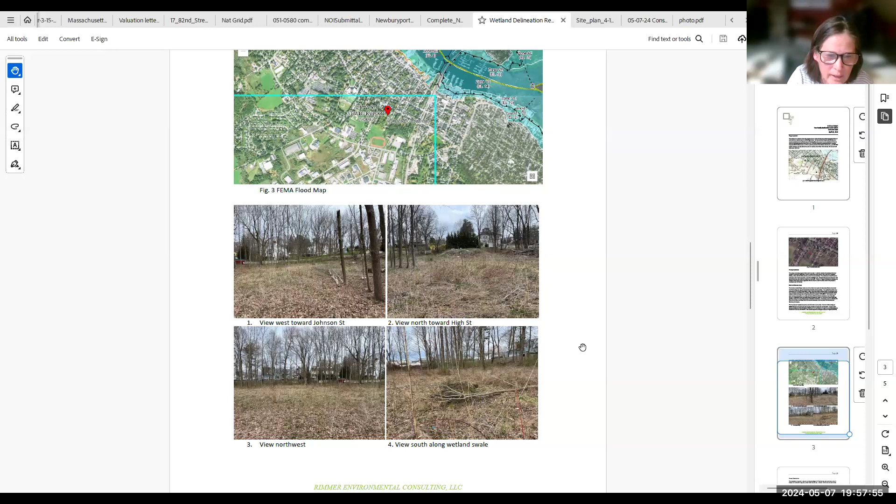If you want to pull up the site plan, Julia — oh sure, this is some photos, that's helpful. We're not in the flood zone here. The site is relatively sparsely wooded, more wooded at the far west or north end that you're looking at. You're looking towards the west there, towards Johnson Street and then north towards High Street. You get the general idea that it's mostly a cleared meadow, but there are certainly trees along the perimeter.

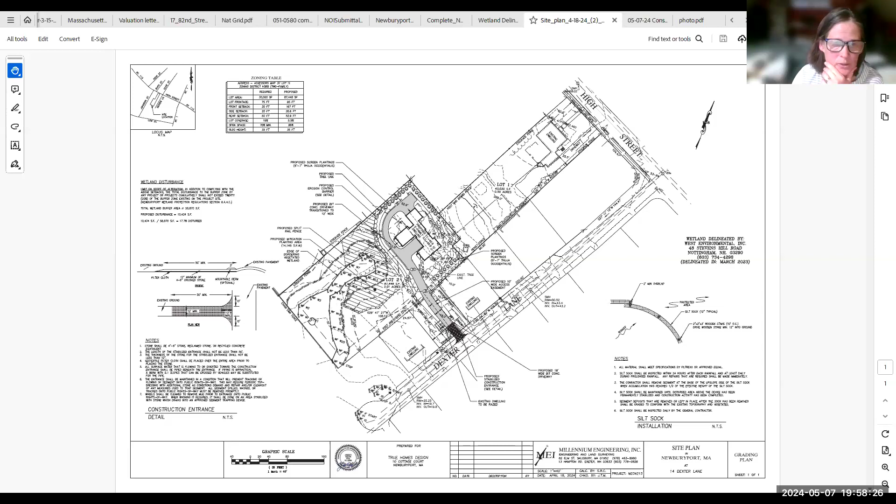And we can take a look at the site plan — there's a finger of wetland. Let me say first that the site generally slopes from High Street towards the south and drains towards the middle school. There's a trail from this property to the fields at the middle school. There's a finger of wetland, mostly marsh vegetation — purple loosestrife, sedges and rushes, mostly in that wetland. It was delineated by Mark West last spring and confirmed by me. So we're showing, off the edge of that wetland, a 25-foot offset with a split rail fence around it.

Exactly. And you can see from Dexter Lane, although it's outside of the buffer zone, the existing house on 14 Dexter is proposed to be razed and eliminated, and a new bituminous driveway coming into the site will service a 2-family home. We've worked with Julia on this design to try to minimize the extent of buffer zone impact, but it's really not possible to develop this lot without some buffer zone impact — we're able to stay below the 20%. We've got 17.7% buffer zone impact.

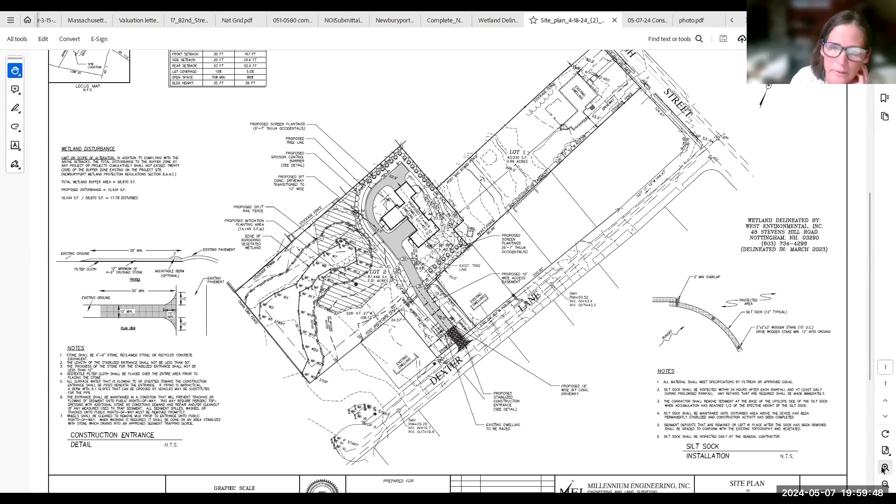And we're proposing a significant amount of mitigation in exchange, which includes removal of invasive species in the crosshatched area — that includes multiflora rose, Tatarian honeysuckle, purple loosestrife. There's an assortment of invasives proposed to be removed and then replaced with native shrubs. We have a minimum of 70 native shrubs proposed as replacements for what would be removed, and there's an invasive species removal plan included with the notice of intent that describes the methods that would be used.

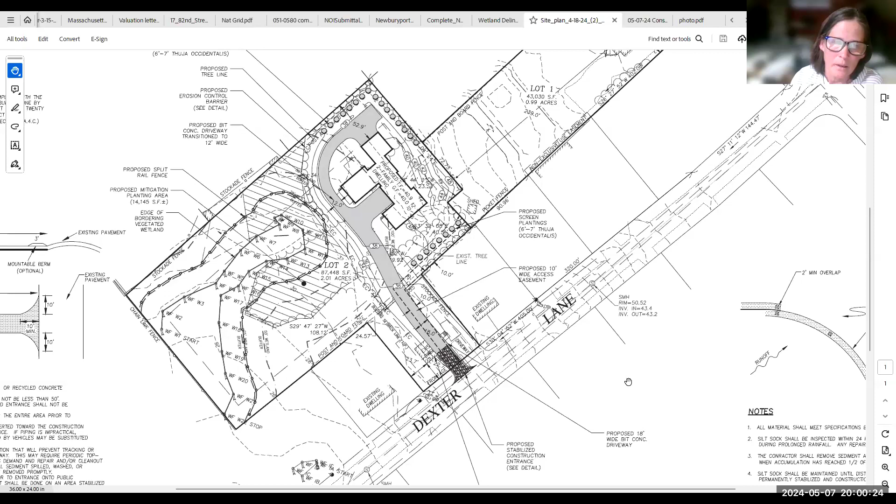And what else can I tell you? I think one of the big things you're looking for is the total buffer zone disturbance. We've pushed the building as far back as possible. There are steep slopes leading up to the High Street lot, so there's a limit to how far north it can go. We've minimized that as much as possible. There are also landscape plantings proposed along the perimeter to provide a buffer from this project to neighbors. There's no disturbance proposed other than grading along the edge of the driveway toward the wetland resource. We're trying to maintain that as open space as much as possible, but enhance it with higher wildlife value species. So there's 14,145 square feet of mitigation area proposed.

So Mary, in your narrative you talked about shagbark hickories and white oaks on the property. Are they staying or being cut down? There definitely need to be some trees cut down. Some of those are up in the upper northwestern corner, in that area where the driveway circles around - there's definitely a grove of trees there. Most of the driveway goes through more or less field, but when you get to where it starts curving around to get to the second unit, there's definitely trees in that area.

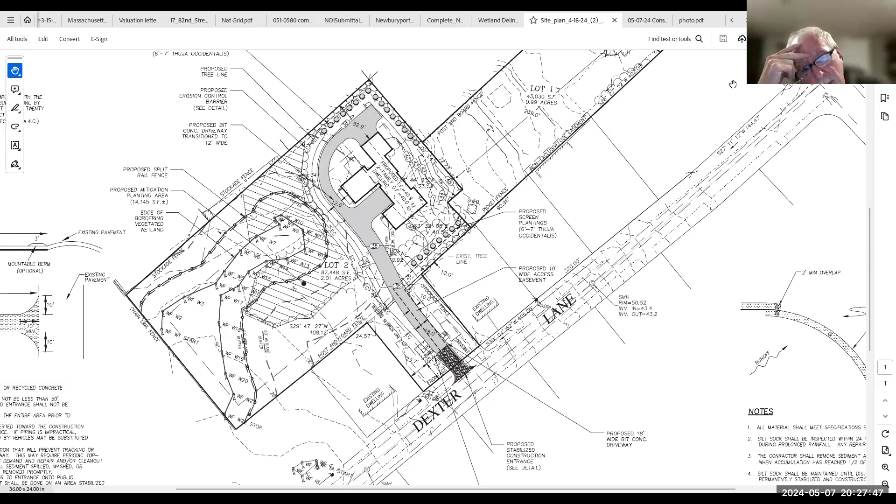I suppose there's two different levels at least for this two-family dwelling, but why couldn't that driveway be shortened on the property? Yeah, we're working on a couple of different constraints - one is the amount of buffer zone impacts that we're allowed to have. The other is the existing topography and what the slope is. And the other is just the turning radius needed to get access to garages and things like that. So we've worked on a couple different alternative designs for this plan, and this was the least impactful one that we could come up with.

That - you know, originally there were two single-family homes proposed. Was it two? Yeah, I think it was. And just by combining them, we can reduce the impacts quite a bit and stay further outside of the buffer zone. So that's the math that we have to work with. There's just no opportunity to put the houses closer to Dexter Lane without significantly more impacts to the wetland buffer zone.

Well, that parking couldn't be grouped on the south side of the building, where you've got that? It just doesn't work there for a two-family home to have all the parking on one side of the building. So that's not what is currently proposed, I guess, is the answer to that.

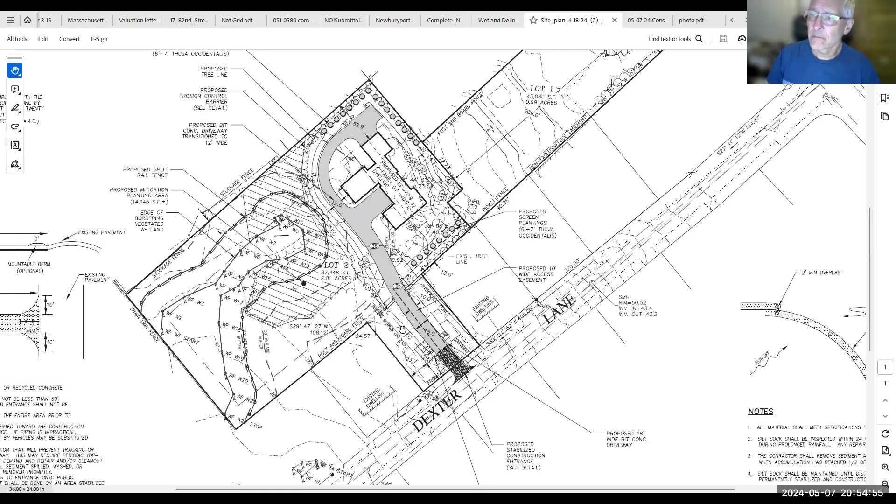All right, so we've got our site visit for at least 2:30 on the 14th. And do you guys want a continuance to the next meeting or to the first meeting in June? I think the next meeting, please. Okay, so to the 21st of May.

A motion to continue this? I got one more comment, I guess. Given the abutters' concerns and the increased rainfall we're getting, I think you need to think about stormwater management and making sure it doesn't increase runoff going onto the abutters' land.

We'll look at that. Okay, I'll make a motion to continue to the 21st. Second it. All right, roll call: Steve Moore, Yes. David Vine, Yes. Dan Warshall, Yes. Bill Mullins, Yes. And I vote yes. Thank you. All right, see you on the 14th.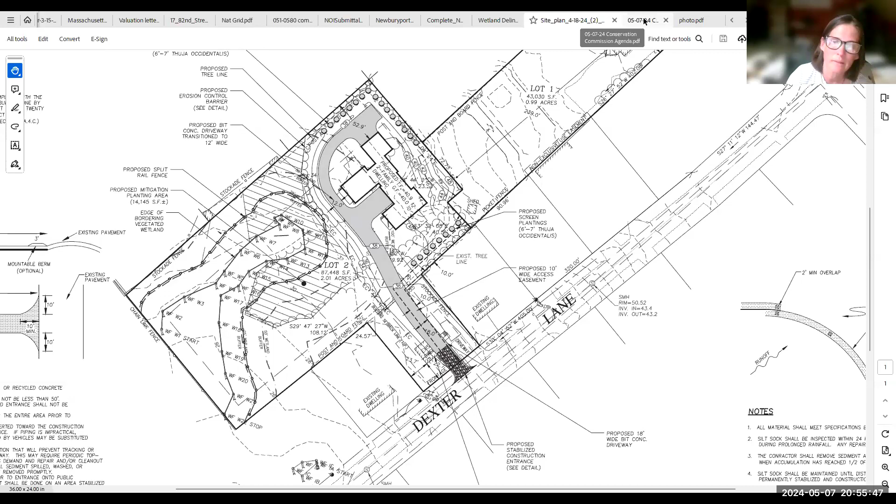All right, can I get a motion to close the public hearing? So moved. Second. All right, roll call.

I don't think you want to close the hearing, you just want to continue it, right? No, didn't we already continue? Yeah, continued, but we're closing the public hearing section, right. Oh, okay, sorry. Yeah, this is the other one. Okay, we're not closing yours, no. Okay, thank you. Where was I here?

We'll go again. Steve Moore, Yes. David Vine, Yes. Dan Warshall, Yes. Bill Mullen, Yes. I vote yes. All right, have we anything else this evening?

Unfortunately, yes, we do have one more thing this evening. It's a new enforcement issue. Let me pull up...

I don't know if some of you may have been the ones - David, you sent me something about this violation on Grant Street on the dunes out on Plum Island. A bunch of people saw something posted on Nextdoor where there were trucks and sort of like a backhoe pushing sand through the dune out on Plum Island, and it turned out that it was at the end of Grant Street. So I'm just going to pull up these photos.

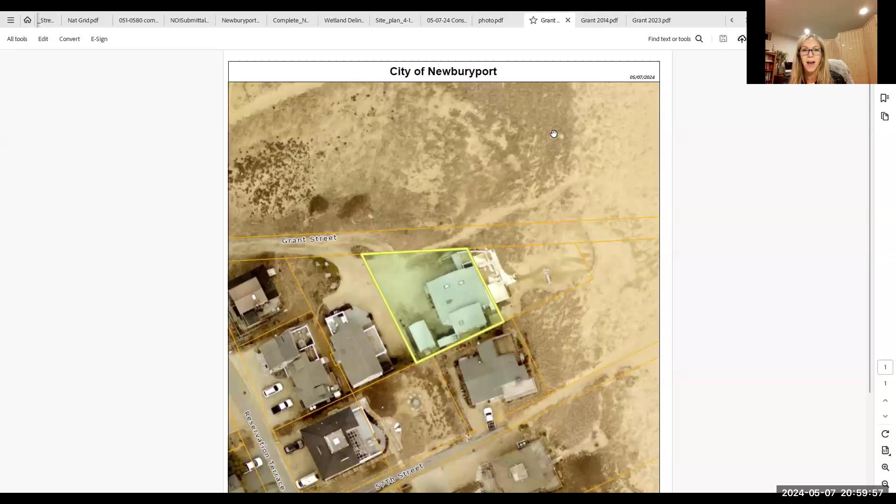So then in the spring, I think what's happening is they're getting some equipment and pushing the sand out from this low area where their house is, back out to the beach, rolling out their walkway, etc. There's a lot of alarm bells going off from people who saw this happening. I think we just need to discuss whether we feel it's a violation that needs to be addressed, or whether you feel comfortable with them having this access way through the dune to the beach, since it is their property.

They're altering the dune though, right? Yeah, it's an alteration of the form of the dune. That said, we do put special conditions in project applications for single family homes where when sand accumulates on your driveway or deck, you're allowed to remove it by hand and place it back on the adjacent dune. That's something homeowners are allowed to do. Typically they don't need a backhoe to do that. But I don't know if this is within that scale, or if it crosses a threshold. I wasn't out there to see it, but there's video.

It would seem to me that their mat could just go over the new sand. It doesn't have to be dug out and flattened. I think they've gone beyond what we might permit. I would agree. I would like to have them in to have a discussion about what they do.